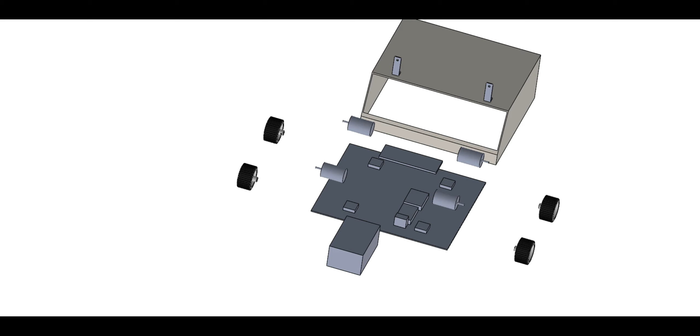Robots can be used to overcome the setbacks of manual rescue operations. Our bot has a sturdy aluminum body with brushless DC motor, packed with Jetson Nano, MQ4 gas sensor, Arduino Uno, RPi, night vision camera, lead acid battery and motor driver to make sure that it works efficiently even during hard situations.

The bot also has a cart attached to it that will help in providing first aid to the people stuck in disaster affected areas. Three analyses were performed on the body of the robot, which are front impact, side impact, and rear impact analysis. For front impact and rear impact, 8 G force was applied with an impact time of 0.15 second.

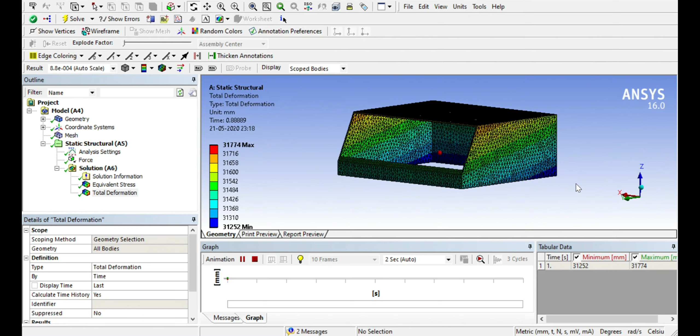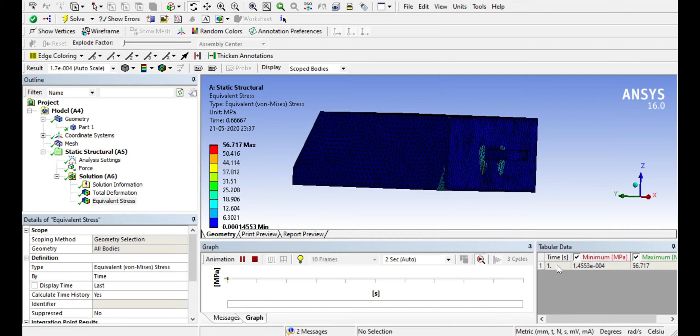And for side impact analysis, 4 G force was applied with impact time of 0.3 second. Finally, load was applied on the front face, side face, and rear face for respective impact analysis, solving for maximum stress and deformation produced. The analysis was performed in ANSYS Workbench 16. Mesh of 5 element size was generated, keeping relevance sufficiently high so that the force distribution is smooth.

Now heading towards the simulation of the robot. The ROS bridge command written in the terminals is used for launching the bot and the WebSocket server. An interface between the client and the server is created and the website is launched at port number 8000.

The dashboard offers three features, namely control, camera, and mapping. Whether the bot is connected to the base station or not can be easily checked using the connection status log message bar. The robot can be efficiently controlled while sitting at the base station using the forward, backward, left, right, and stop buttons. Camera feed can be used for live streaming of the environment as captured by the bot.

Now moving on to controlling the bot from the dashboard. ROS Run is used to create the video simulation on dashboard and ROS Run RViz does octomapping using Octree. It not only generates a full 3D map of the arbitrary environment but is also updatable.

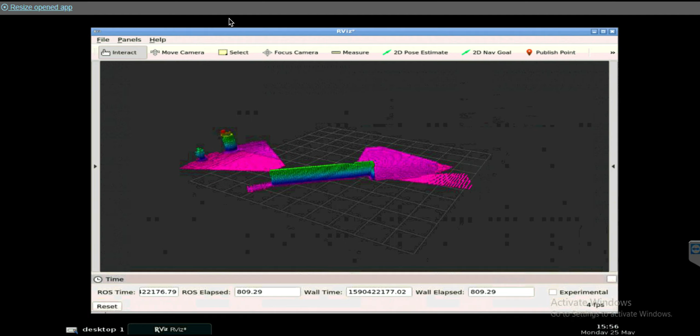The map is extendable when new areas are explored, and the map so generated allows efficient visualization from coarse overviews to detailed close up views. The map is compact and can be stored easily both in memory and on the disk.

Moving on, Gazebo offers the ability to accurately and efficiently simulate robots in complex indoor and outdoor environments, thus helping us know how the bot will react in unfavorable situations. Analysis of the area and rescue operation can be performed easily using all these features, and humans can be very efficiently detected using the map and the camera feed.

We also interfaced a flame sensor to our bot, and whenever the flame is detected, it sends an alert message to all the people sitting in the base station. We are currently working on adding more features to our bot to make it more efficient.